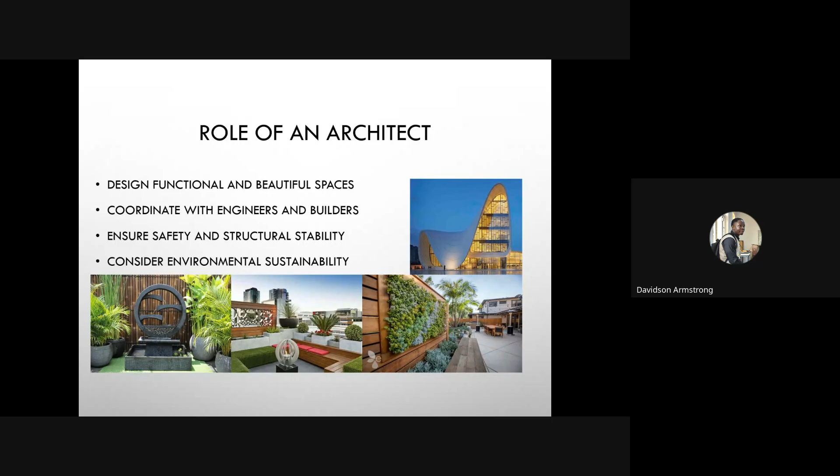So that's what I was talking about, the roof, the panel they use for the roof. They can be recycled and used for other things in the future. Go to the next slide. So architecture combines arts.

Excuse me. We lost you at the beginning, where you were saying what is architecture and so forth. This slide, the next one, the beginning of that slide.

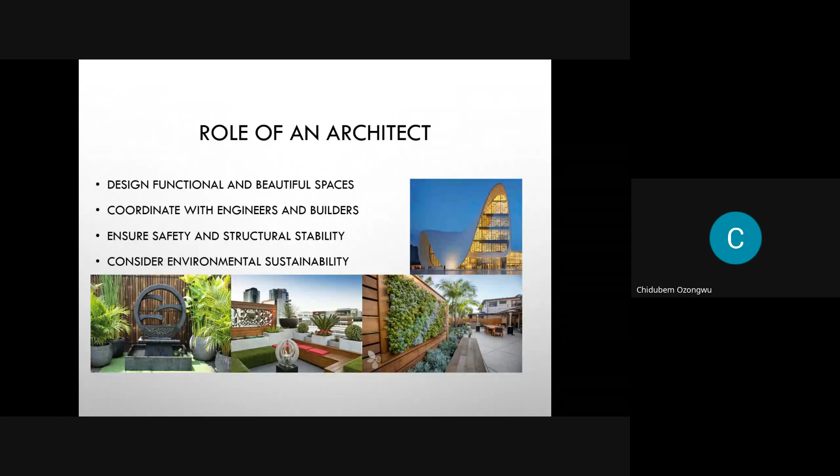Okay, so I was saying architecture is the fusion of arts, science, function, and responsibility. So in architecture, when you see a building, the first thing that comes to your mind is, oh, this building is a very beautiful space, a very beautiful structure, like the one I just showed in the last slide. That is the arts of architecture.

It's like, oh, you see the greenery around the building, the gates with the ornaments, everything about the building, and you're like, wow, this is architecture. Now you're looking at, okay, if this is the building, what's bringing about this building? What is the science of this building? That's when we look at the structural stability, the doors, the windows. Those have to do with dimensions, which is another aspect of science.

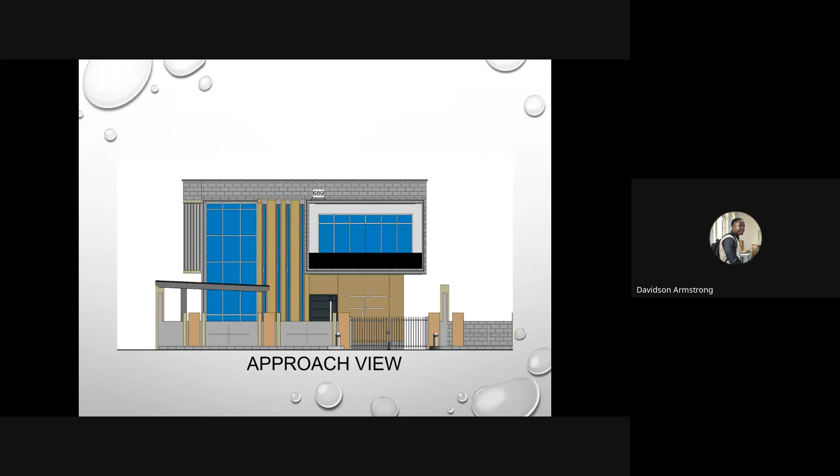Because there's a philosophy in architecture that says function follows form — that's when you have the form of a building before you decide the function of the building. While there are other philosophies that say form follows function, that the function of the building comes before the form. So that's what we talk about when we say, how does the form relate to the function? I don't know if you have any questions, because that's basically the introduction to architecture.

All right. Yes, Kelly sir, has been raising his hand. Kelly, can you ask your question?

Sir, please, can you help me move the diagram to the very first floor plan? I have a question to ask about that.

I wanted to contribute since Engineer Daniel said we should talk about the errors in the plan. The door can be moved towards the right side. Then the door for the bathroom, the toilet, can be moved to the front side.

So it can still work like that, so you don't need to enter that little lobby before you get to the toilet, because it's like a visitor toilet. You're suggesting the door to be outside, yes, for the toilet, because I thought it's for visitors, since the other door clashes with the main door to the living room.

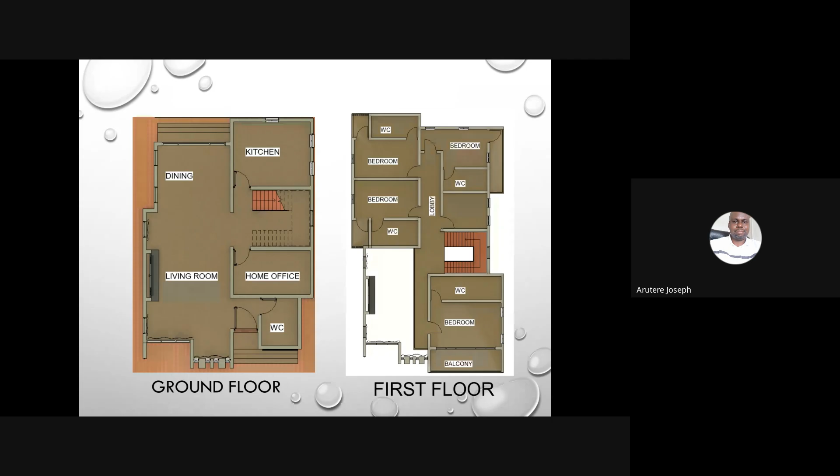If you want to enter the building, there are three stairs that you will first climb before you enter the main balcony or whatever. So at that point, is that where you are going to put the toilet sink, or rather the WC, and the window will also be there? So how will you run the piping? That's the area I'm trying to understand, whether it's possible for the WC to sit on this wall.

Can you see this wall? Yes, I can see that. So the WC could back this wall right here, and we can have a small window on this side, and we can also have the window on this other side. I think that is the proper side the window would be, that would make it look beautiful. For the window to face south, I think it's not too proper.

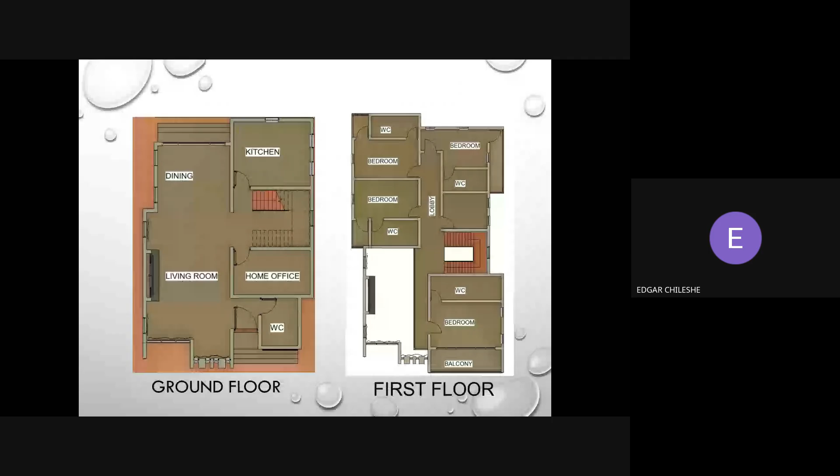Good evening, sir. I'm not comfortable with the toilet, the WC, when you just enter the entrance, the first thing you meet is the toilet. So I was thinking if we can do some adjustment where maybe the toilet can be moved where an office is, and then the office we bring back where the toilet is. The second question I have is how do you develop a concept?

So you are saying the WC should be swapped with the home office. Yes, it's possible, but we also have to consider that the dimensions for the WC cannot fit, or the office cannot fit into the WC space. The home office actually goes along or aligns with the walls of the building. As we know in architecture, there are what we call grid lines, this line, this line, then the ones horizontally.

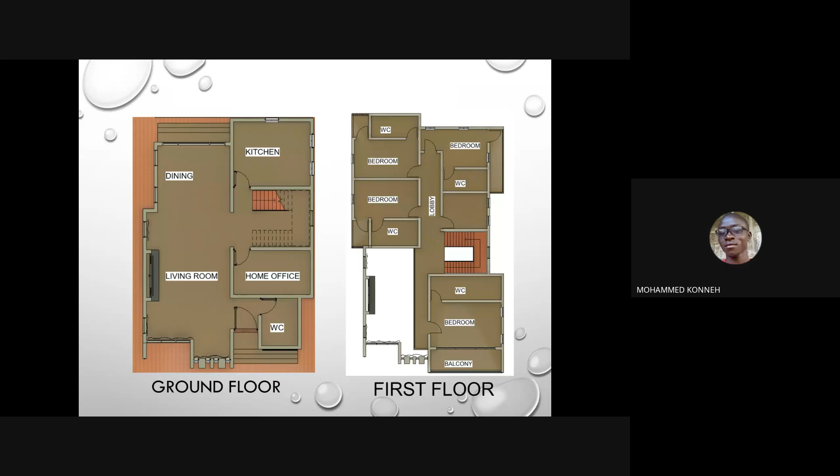So when we look at the WC, to move it to where the home office is, means we have to have an equal amount of space for the home office to be returned back to where the WC is. And for that to be the case, a lot of space will be lost on this part to put the WC here, and then a lot of space will be taken from this area to have the home office. I don't know if you understand me, because the toilet has to be on this side for ventilation.

And then you said, how do we develop concepts? Maybe before you answer the second question, what if we can adjust the WC under the staircase? I'm not comfortable when you just enter the room and the first thing you see is a toilet.

I get your point, but it's a visitor's toilet, so there definitely has to be a toilet for the visitor. And when you come in, if you look at it well, the door is going to open to the right, which means your attention is going to be focused to the left. So the toilet there, it's not something that will be concentrated on, even though it's a need and a necessity that it must be there.

Because if we have that toilet removed from there, there's no other place it could fit into. You were saying we could put it under the stairs, but if you put it under the stairs, the headroom for the WC won't be enough, because the stairs would have taken part of it. It means when you go into the toilet, you have to bend down. I don't know if you understand me.

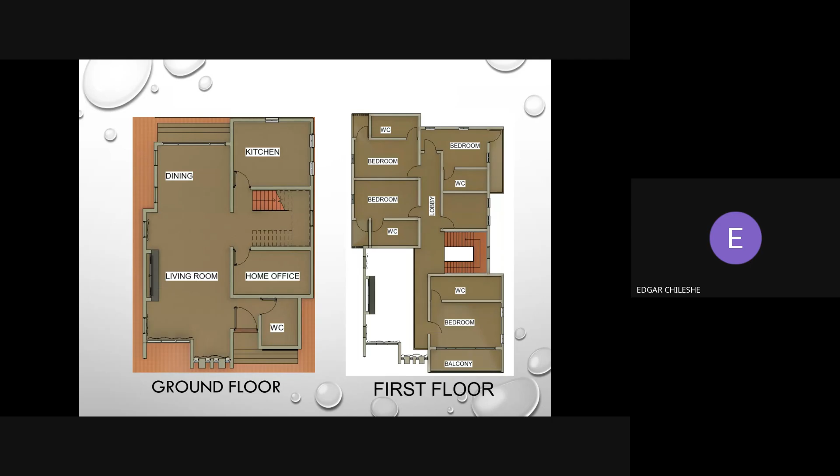Okay, well, I got your point, where you say that when you're developing a concept, a concept is supposed to move with—it's more or less like a form, in short, not so? And then you say that a form is supposed to follow functionality of the building. Functionality, yes, yes. So now, let's say, for example, I'm told to design a school, and then I come up with a concept of an oval egg shape. How can it be related to the function of the building? Okay, you create—your concept is the oval shape of an egg, and then you want to create a school.

So you're going to make sure that when you look at that oval shape from outside, it is telling you, okay, this is a school, or this is a commercial building. Say you're looking at a building that is round, a skyscraper that is 40 floors, and they're telling you it's a school. When you look at it, you say it's a lie, because a 40-floor building cannot be a school. It can only be an apartment building, an office building, or all that.

So the concept, the oval shape of an egg, has to also tell you that when I'm looking at this egg, it is telling me that it is a school. It means the surroundings of the egg would be telling you that. Like when birds lay eggs, they lay them on what we call sawdust, or in poultry they use wire mesh, this kind of small wire mesh. You can use that around the building for a campus-like site. Then when you look at the egg in that site, the site is going to tell you this is an education environment, and then you see the egg there. So the egg is just aiding them to see that this is the function of the building.

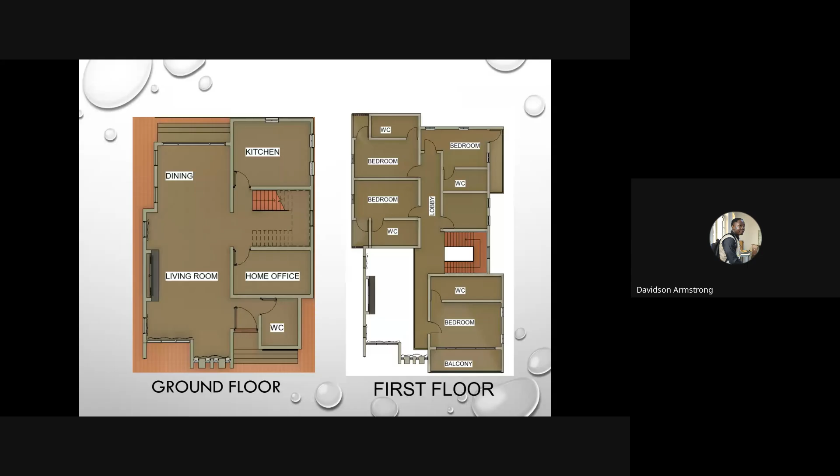Okay, let me add to this, please. Your concept starts from your site plan, the shape of the land first. You need to know the shape of your land, that's where the survey comes into play. Because some people, if you plan an egg shape, and the land you have is like a strip of a rectangle, the egg shape might not fit the whole thing with all the surrounding things you need to have in the school.

So if you have a school, your concept starts from what the survey plan is saying. After that, the next level is what do the people want? What do they want to communicate by the building? In the slide, Davidson talked about how some people want to communicate unity, and they put things around to make that unity. If you take some banks, you see that they have a wide entrance, a wide entry wall. It might not be functional as something somebody can walk into, but it says you are welcome because of the wide entrance. Mostly Access Banks have it in Nigeria - in the front of the building there's a wide wall standing, and just inside it, you see an entrance funneling in. That is telling you welcome. So it depends on what the people are trying to communicate. That's when you have all those forms.

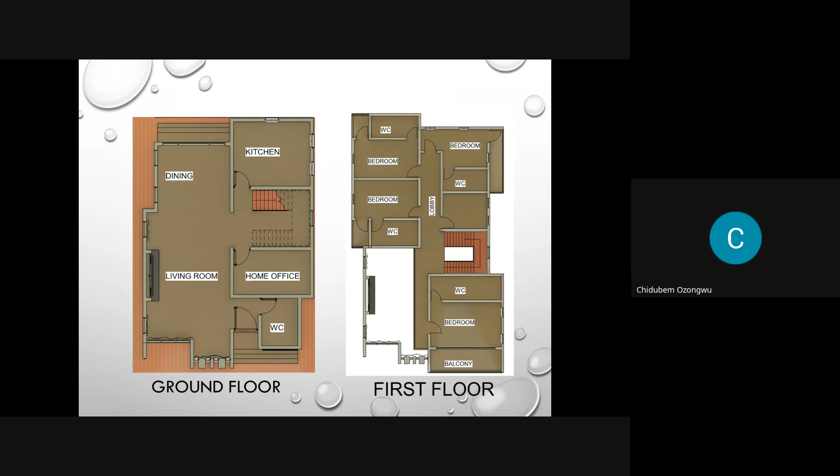But in the meantime, I just want to show the hotel. Dubai Hotel, what's the name again? It depends on what the people want to communicate. In Dubai, there's a building that looks exactly egg-shaped because of what they want to communicate. I think it's called the Burj Al Arab. Burj Al Arab is the tallest one. Oh yes, isn't that Burj Khalifa? Yes, that's correct, Burj Al Arab, because Burj Khalifa is the tallest one. Yes, that's correct.

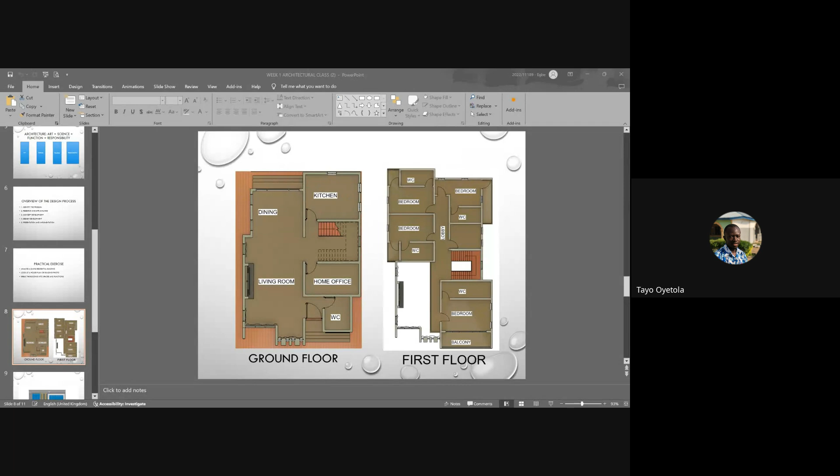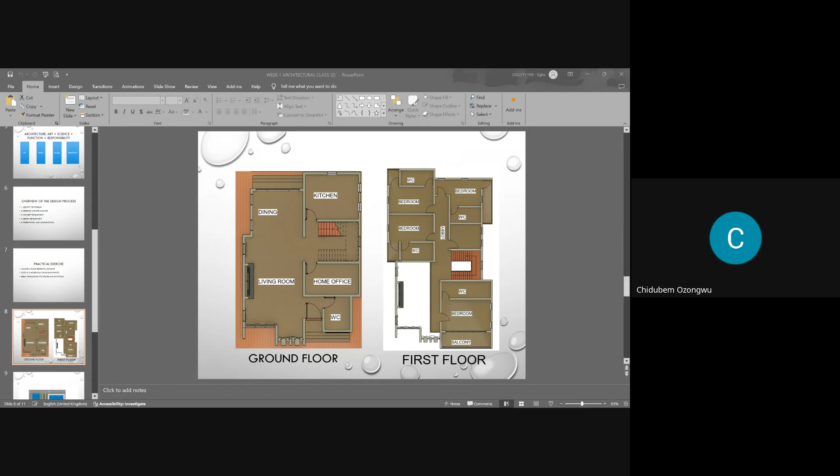I want to open the picture and just share and show you people what I mean by that. Images. Okay, just give me a second. In the meantime, Mr. Gerald, get set with your question while I share this big image. Davidson, you can stop sharing, please.

So just as I said, if it's on land, it depends on your survey plan. It's very, very important. Okay, so let me answer. Mr. Gerald, you can ask your question, please.

Yeah, good evening, sir, good evening everyone. Good evening. Yeah, sure, sorry, I even said last time that I can't see the screen.

I just wanted to find out about the doors. Are all the doors in the right positions? David, you can share your screen once more, please. Okay sir. So that's the question, are all the doors in the right position? And then the second question is, ground floor and first floor, is it the same plan or is it different? Because when I see the measurements of the ground floor and the first floor, it seems like it's different, and also the shape is different. So if it's the same one, how can you do the pillars? For example, where there is a staircase for the ground floor and a staircase for the first floor, how can you do the pillars?

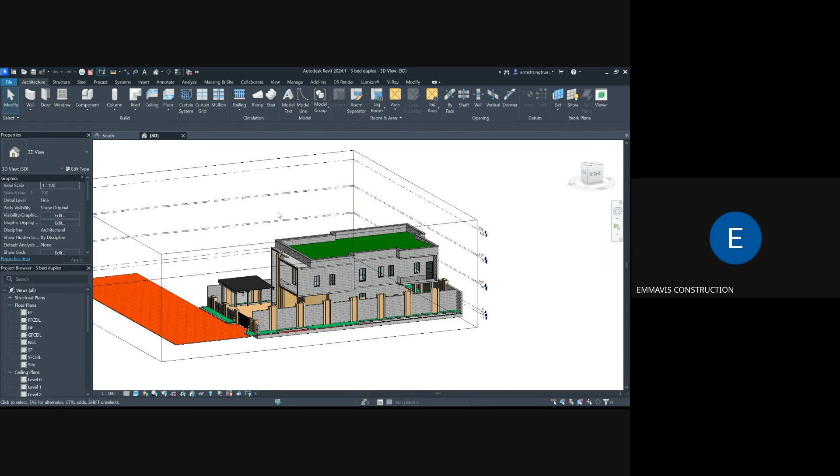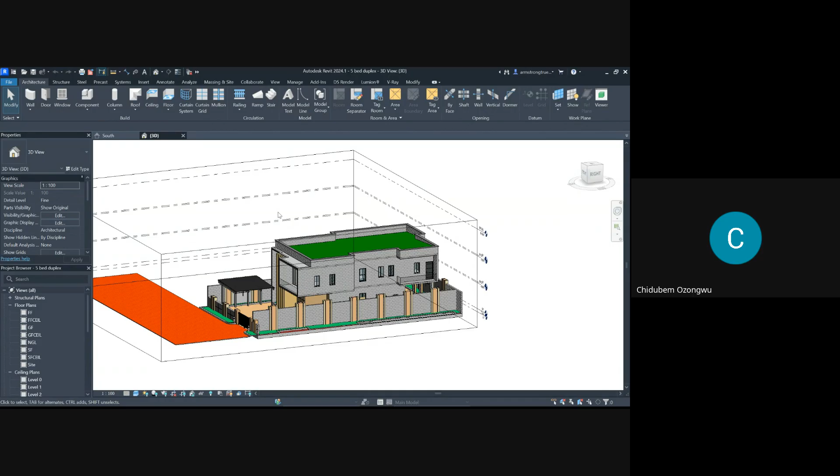I don't know if you can see this. Yes, we can all see it. Can we see this? Yes. Hello? Yes, we can. You can see it. Yes, we can. Go on.

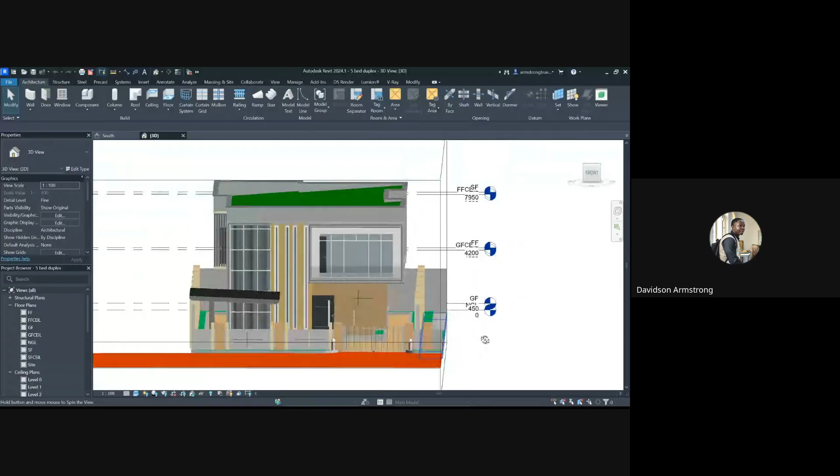Okay, so this is how the building looks like from the front. This is how it looks like. And if we look at it well, we see that the back, like someone said, the scale is different. And also, not just the scale, when you follow the walls, you discover that the top is longer than the ground floor, the first floor is longer than the ground floor.

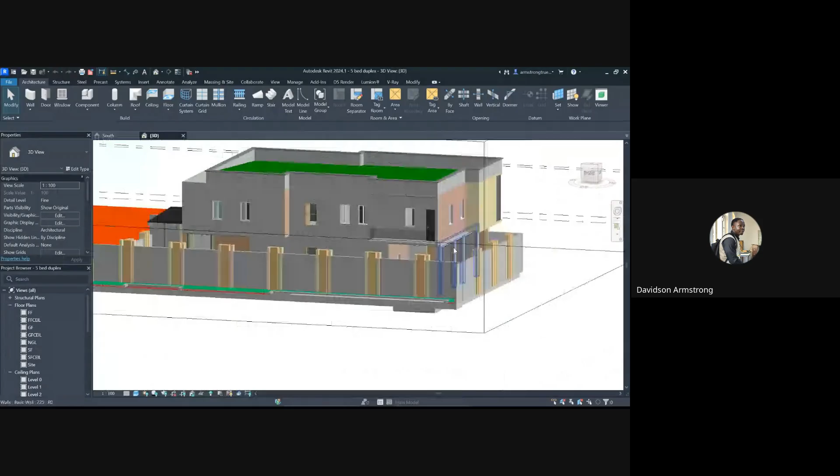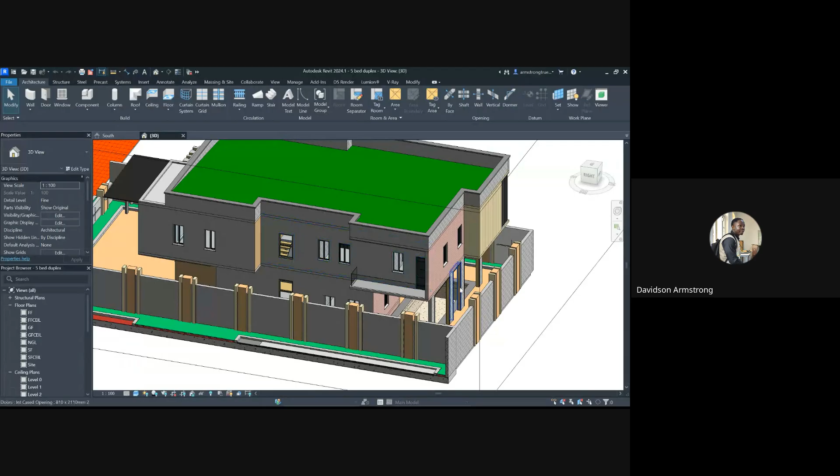And it's because on the ground floor, we have a pool under the first floor. Class, I didn't really think about it, I was just putting up things just to make up. It's fine, just to bring out the beauty.

Just put it there. So when we look at this design, it's going to tell us that when you look at this wall, the pillars, the columns are going to be here. They are going to carry the first floor. Then at the back, we can see this.

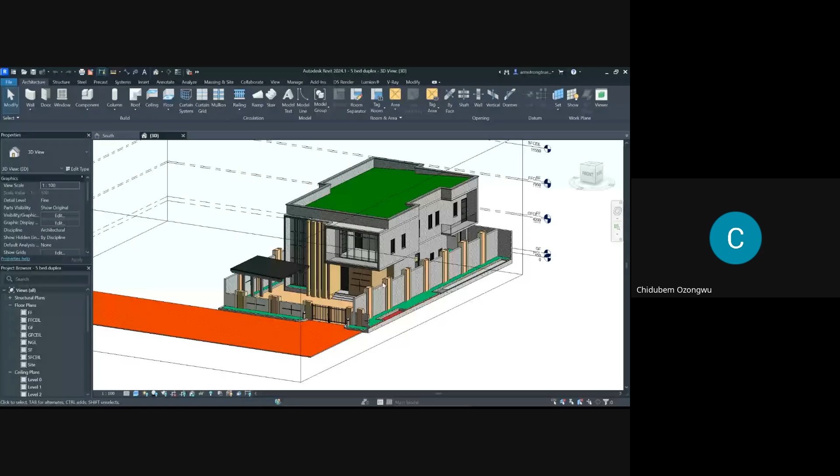Yes, sir, go on. The next person with the question is Mr. Gideon. Okay, over to you. All right, thank you so much. Good evening, everybody. Good evening, sir.

I just want to make a contribution or contributions. And again, I also wanted to ask a question, or I needed a clarification. But in the course of discussion, I think I've been cleared on the area I needed clarification. I want to contribute starting from hello.

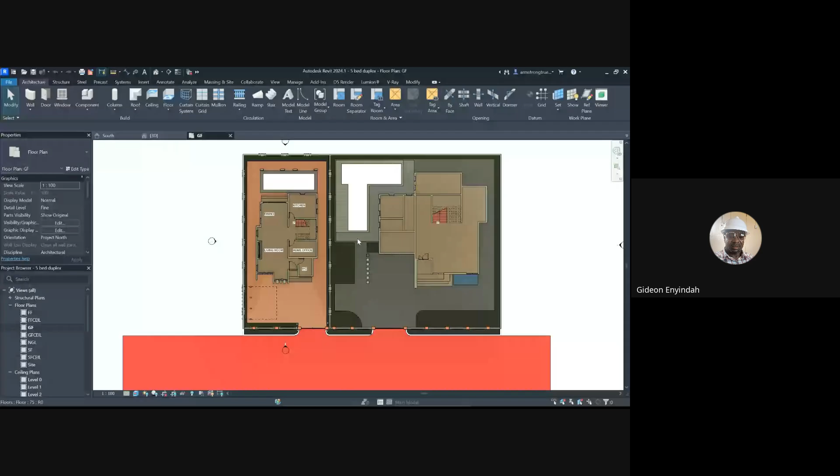Yes, we can hear you. Go on. Hello, sir. Okay, starting from pointing out errors in the design, the presenter did quite well at pointing out the errors and explaining the necessary corrections. And starting from the visitors toilet, I want to say that some of my colleagues have asked or questioned the positioning of that toilet.

The visitors toilet. Yeah, I want to contribute that I think that is the best, in as much as it is a visitors toilet. Remember the name and the purpose of it. So it's a visitor's toilet. It is not supposed to be anywhere internally in the structure in the building.

Why? Because you might not know who is going to be a visitor tomorrow and what his intention is. It might be somebody who, say, okay, go ahead and use the restroom, and you're not expected the person to be inside your building. So where it is, is the right position as far as I'm concerned. That's my personal opinion in that aspect.

Then secondly, having the visitors toilet on the ground floor, I'm also of the opinion that there should be another toilet for the owner of the house. It's clear that what we have on the ground floor seems to be a kind of business environment. You understand? But he will be there, he will watch his television, he will prepare his food. He is not expected, in my own opinion, to share the same toilet as the visitor's toilet.

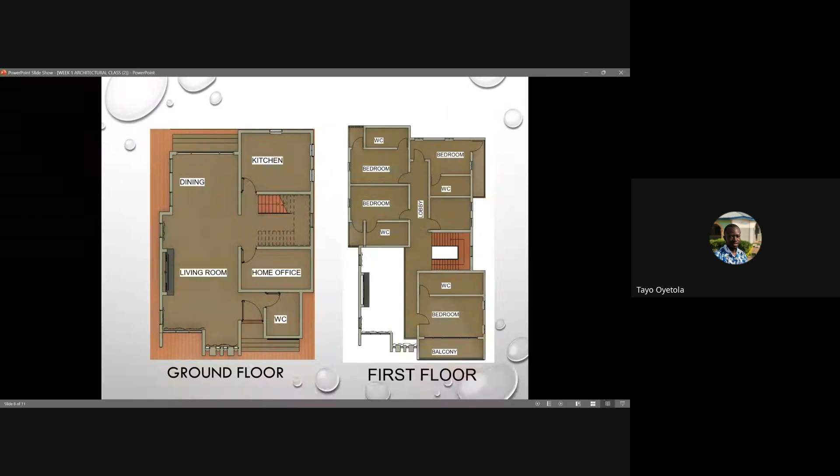Because the example we're looking at right now has a lot of issues—of course it's a presentation, but let's assume this was a plan proposed to a client. There are a lot of issues with the floor plan, and that might happen because we're trying to follow a certain shape, or create a facade which affects functionality. But ideally, we are supposed to have a functioning building, a functioning floor plan, before creating a facade. I don't know if you understand what I'm saying.

Yes, we do. Thank you very much for the contribution. This is not a defense for anything, so just leave it. It's meant for us to talk about the plan and find out what the issue is and learn in the process. That's what this whole video is about.

The first question is I can see some steps outside the dining area, so I don't know if there's a sliding door there or what. And then the last question is the plumbing issue of the WC on the first floor and the dining area somewhere there. So I don't know how we can do the plumbing works. Thank you.

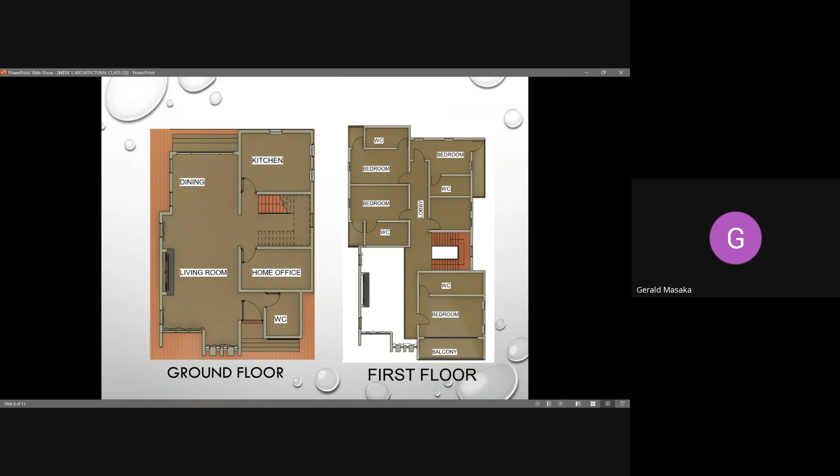Okay, the plumbing works, like we said before, this is a design that has flaws in it, and we are just here to review and identify the flaws. So the plumbing issue of this design is, firstly, the architect has considered that there's going to be a plumbing design, or the MEP will do their design, but his job is just to make sure that in the walls, there is a flow of how these go to the plumbing pipes. I think in this design there are walls through which these plumbing pipes can go through from the first floor to get down.

As per the plumbing work on the design, there is no casing for the pipe to pass through. What I mean is, it can hide somewhere here, but the functionality, or the aesthetics that comes with hiding plumbing pipes, I wouldn't say it's not fully considered, but remember, this is just for us to review, find the flaws, and then figure out what to do.

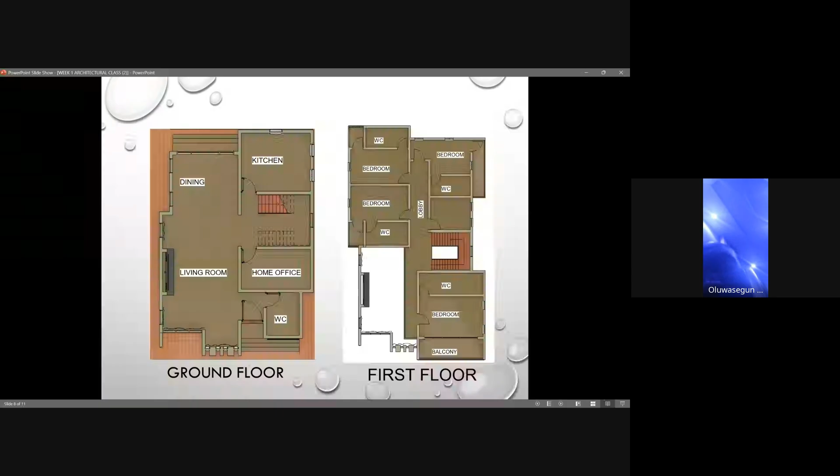Greetings to everyone in the house. I want to ask a question, and I think I also will have one contribution. My question is, since this is introduction to architectural design, is architectural design environmental? Because there are so many things - when you are designing for some people, they will tell you, you need to understand the culture, and I just really want to know that.

Then my contribution, which I can actually borrow from the last speaker when they discussed cost - some people were saying yes, they should have 2 toilets, and I think from everything I've been seeing, hardly can you have 2 toilets, except when you have a guest room on your ground floor, because of cost. And again, functionality - when you have 2 toilets, one for your guest and the other primarily for you, the owner, you will find out that in terms of usage, people will prioritize one over the other, and that could create a mess in the living room.

So I believe once there is a guest toilet, even if there is no guest and you are in your living room watching things or doing things, if you want to use your visitor's toilet, so be it, as long as it is your room, your apartment, and you are neat. And if you just feel like you don't want to use it, you want to go to your bedroom - but having 2 toilets is an additional cost, and in terms of functionality, I felt something will be off in the long run in terms of maintenance. So that is my contribution to that.

And to my first question, I want to know if architectural design is cultural and environmental. Thanks.

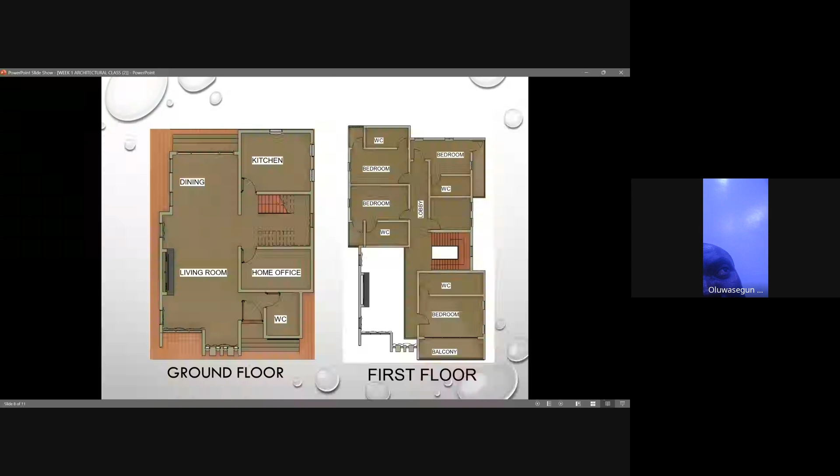And I also want to chip in something. When Engineer Mike was referring to the hotel in Dubai, it is always very necessary to come up first with the survey. Even if they are building on water, they do survey the water. These are the works of geoinformatics, those who deal with marine surveys. They do surveys on the sea to know the depth and the areas they want to use. So even before building that hotel, they must have conducted a survey on that area to know the square meter they want to use and the depth of the sea for planning. That is just my contribution.

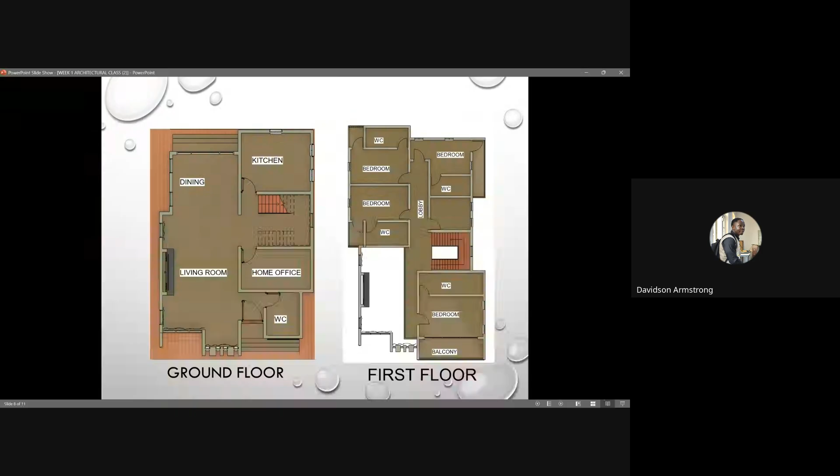So I think, on more detailed review of the design, the walls on the ground floor and first floor should align. The design is meant to be flawed so we can identify the flaws, because it forms part of our discussion. And we've been talking about this flaw for almost an hour now, and that is what it is designed to be.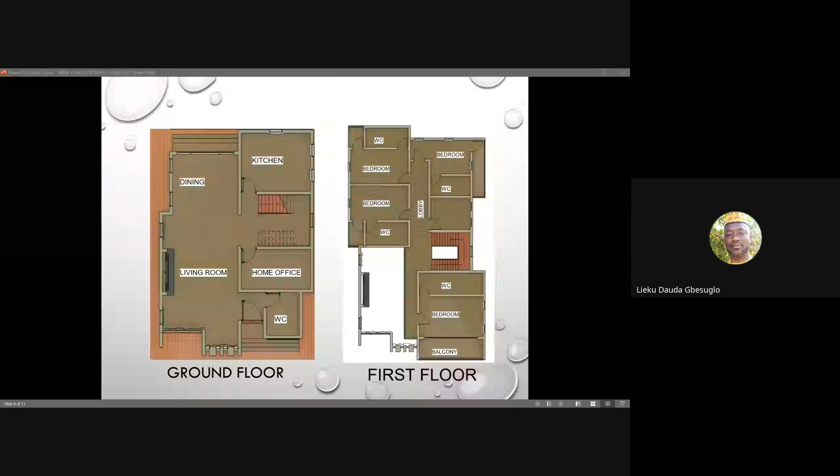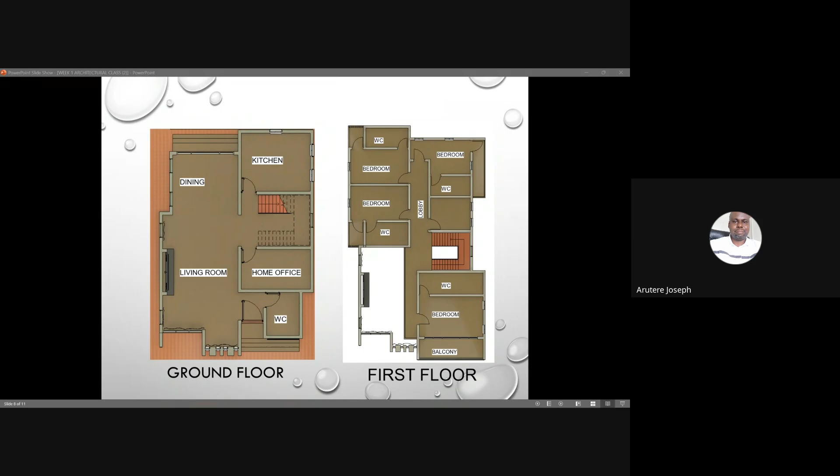I want to ask if you're engineering the mobile version of the Revit training software just for training, because this issue of light and using the laptop or the desktop is really giving me a lot of concern, and it's making me not catch up with the assignments and things like that. So if you can do the Android version or mobile version, we can use our phones to do all the assignments or learn through our phones. If something like that can come up in the nearest future, thank you.

My brother, you can learn via your phone. The web app that we have on the platform can be downloaded on desktop, on your phone, and on your iPad. In fact, the way you should learn is to have a phone by your side and your laptop on the other side. As you are watching through the phone or tablet, you are practicing with the laptop.

That makes it easy. If you are watching on the laptop and trying to practice on the same laptop, you'll be moving around and it's going to be confusing. Because you have a screen opening Revit, and then you also have the real Revit on your laptop, you wouldn't know which is which.

But if you have a tablet, even smart TVs these days can do it. It's just that we are using a website, that's why I don't advise TV again. But before, I used to tell my students, use the USB, plug it to your TV. As you're watching on the TV, you are practicing with your laptop.

That makes it easy. In fact, most people use crack software, and if your internet is on, for instance, the crack software will not work. Autodesk will capture it and it becomes difficult for you to use the software. So it's better to watch the video on your tablet or mobile phone and then practice with your laptop. The app is downloadable all around.

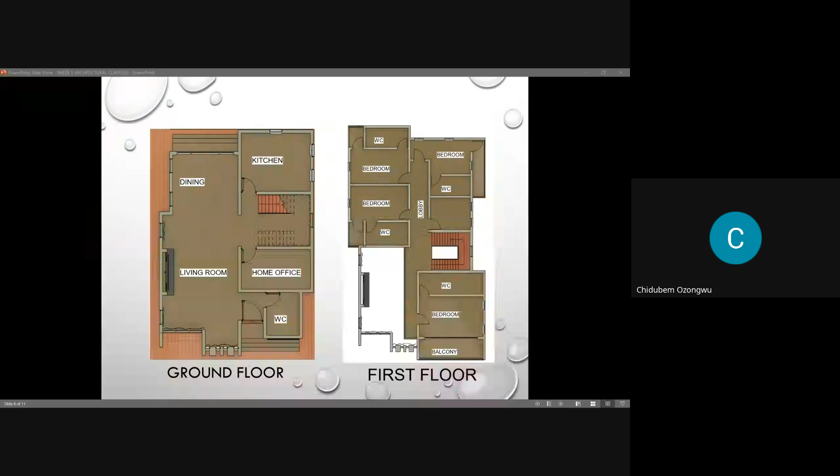It's okay, I will give it a try. If I'm finding any difficulties, I will let you know. Thank you.